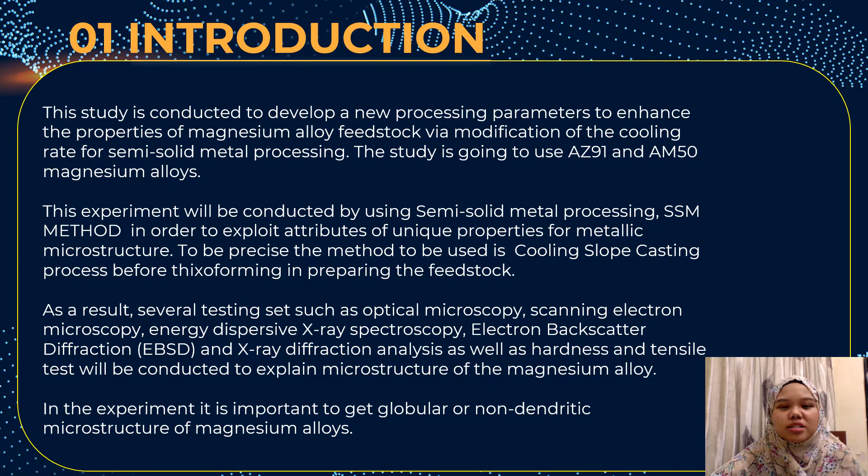This experiment will be conducted by using semi-solid metal processing, SSM, method in order to exploit attributes of unique properties for metallic microstructure. To be precise, the method to be used is cooling slope casting process before thixoforming in preparing the feedstock. As a result, several testing sets such as optical microscopy, scanning electron microscopy, energy dispersive X-ray spectroscopy, electron backscatter diffraction EBSD, and X-ray diffraction analysis, as well as hardness and tensile tests will be conducted to explain the microstructure of the magnesium alloys.

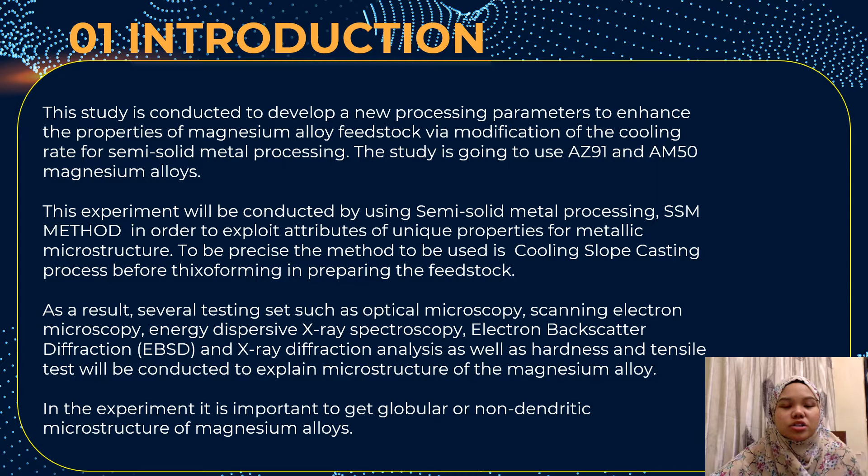In the experiment, it is important to get globular or non-dendritic microstructure of magnesium alloys.

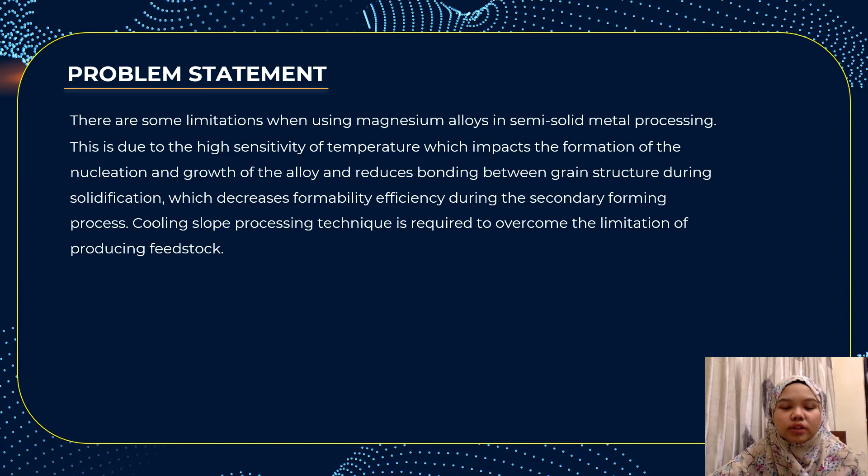The problem statement for the project is there are some limitations when using magnesium alloys in semi-solid metal processing. This is due to the high sensitivity of temperature, which impacts the formation of the nucleation and growth of the alloy and reduces the bonding between grain structure during solidification, which decreases formability efficiency during the secondary forming process. Cooling slope processing technique is required to overcome the limitation of producing the feedstock.

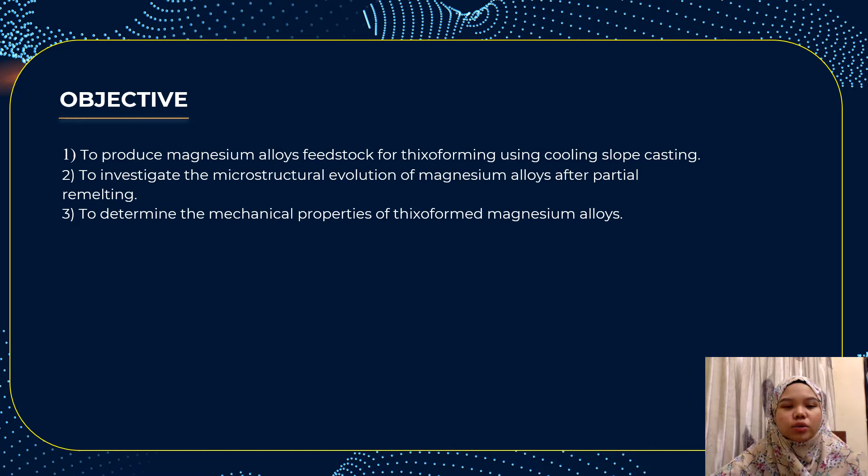The objectives of this project are to produce magnesium alloys feedstock for thixoforming using cooling slope casting. The second one is to investigate the microstructural evolution of magnesium alloys after partial remelting. And the last one is to determine the mechanical properties of thixoformed magnesium alloys.

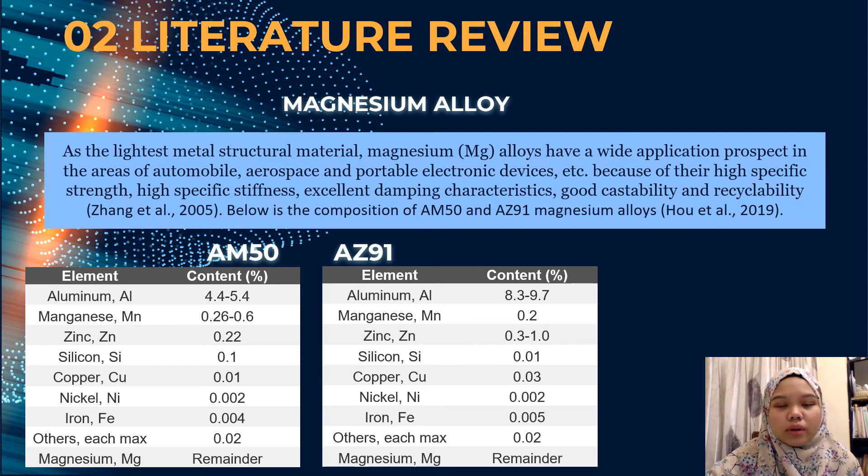As for my literature review on magnesium alloy, as the lightest metal structural material, magnesium alloys have a wide application prospect in the areas of automobile, aerospace, and portable electronic devices, and many more because of their high specific strength, high specific stiffness, excellent damping characteristics, good castability, and recyclability, cited by Zhang et al. 2005. Below are the composition of AM50 and AZ91 magnesium alloys cited by Hou et al. in 2019.

And we are moving on to the semi-solid metal processing. The key element in the SSMP is the globular microstructure rather than dendritic microstructure, and it is the thixotropic behavior of the semi-solid slurry which reduces the segregation and porosity in the castings. Compared with conventional techniques, SSMP provides several advantages like higher product quality, lower forming temperature, higher production rate, and improvement of the mechanical properties through microstructural refinement.

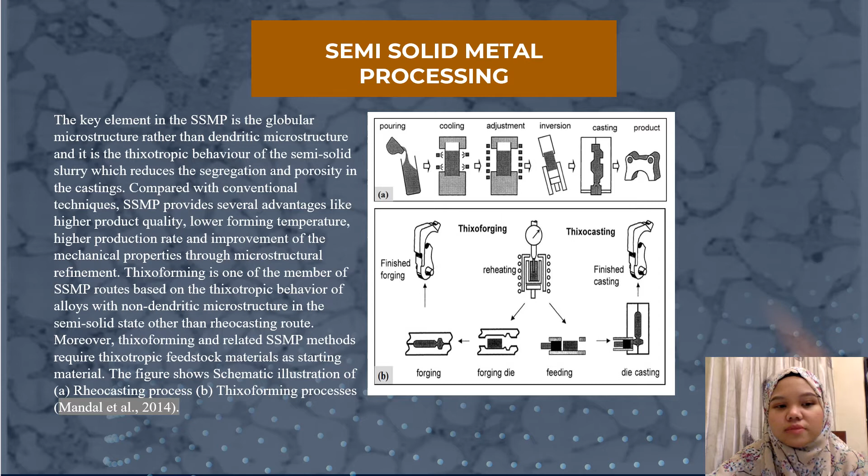Thixoforming is one of the members of SSMP routes based on the thixotropic behavior of alloys with non-dendritic microstructure in the semi-solid state, other than the rheocasting route. Moreover, thixoforming and related SSMP methods require thixotropic feedstock materials as starting material. The figure shows a schematic illustration of rheocasting process and thixoforming process, cited by Mandal et al. 2014.

Next, mechanism for formation of non-dendritic microstructure. Several mechanisms have been proposed to explain the presence of non-dendritic morphology, which involves the formation of fine, near-spheroidal particles through forced convection caused by stirring, as stated by Flemings 1991, Kirkwood 1994, and Fan 2002. One mechanism which distinguishes semi-solid metal slurries from other suspensions is that the particle shape and size vary irreversibly with time.

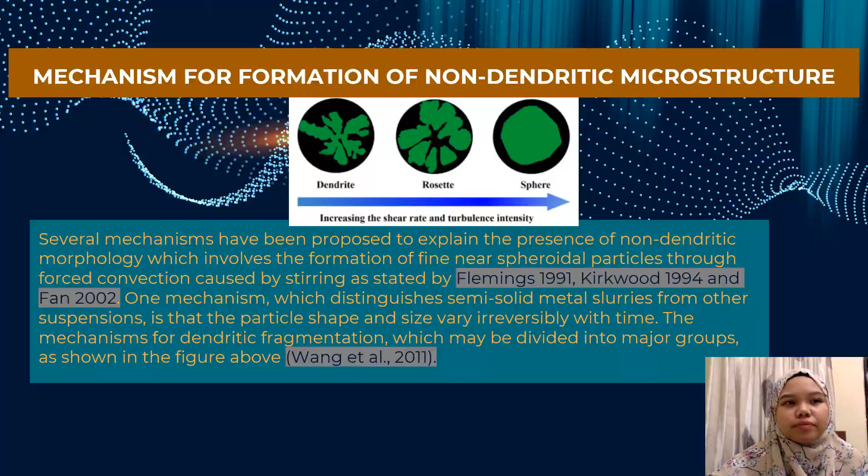Next, I want to explain about cooling slope casting. Cooling slope casting is a simple process which involves pouring molten metal with a suitable superheat through a cooling slope plate and subsequent solidification in a mold. It is a recently developed method to produce raw material for further thixoforming processes, cited by Haga and Suzuki 2001.

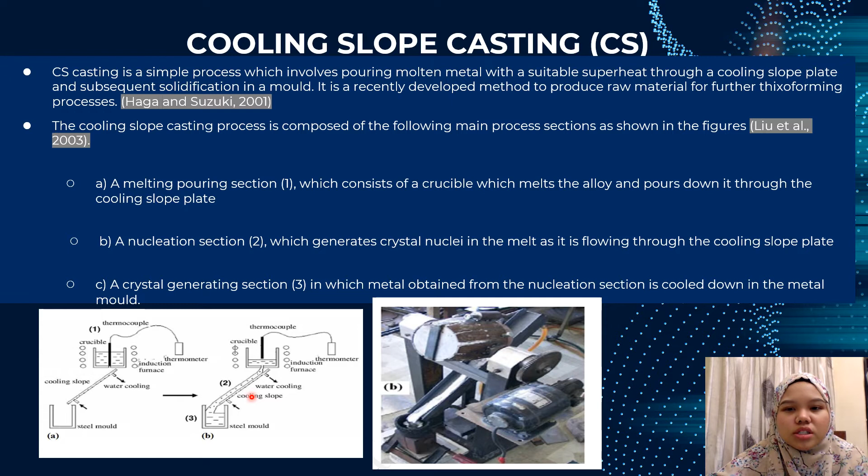The cooling slope casting process is composed of the following main process sections as shown in the figure, cited by Liu et al. 2003. First of all, a melting pouring section which consists of a crucible which melts the alloy and pours it down through a cooling slope plate. Then there is the nucleation section which generates the crystal nuclei in the melt as it is flowing through the cooling slope plate. And then a crystal generating section where metal obtained from the nucleation section is cooled down in the metal mold.

Dendritic morphology upon pouring temperature. Motegi et al. 2004 concluded that the best pouring temperature was 656 degrees Celsius, and they found that increase in pouring temperature resulted in a bigger particle size. Wang et al. 2011 also stated the best pouring temperature is 650 degrees Celsius.

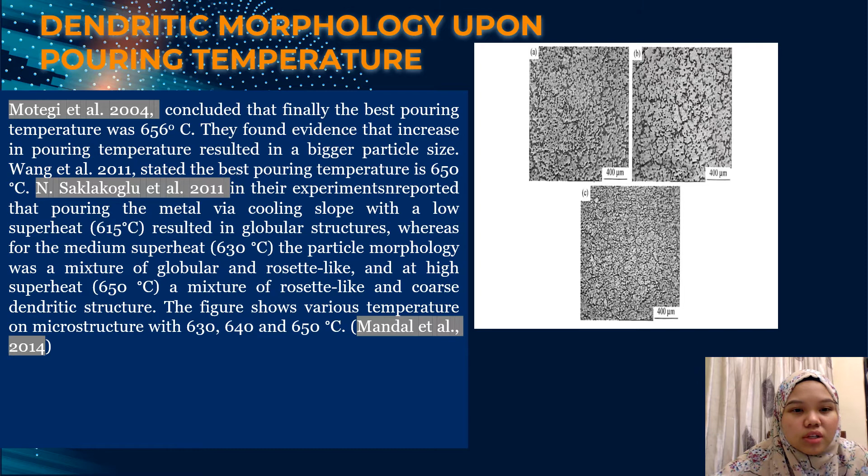Saklakoglu et al. 2011 reported that pouring the metal via cooling slope with a low superheat of 615 degrees Celsius resulted in globular structures, whereas for medium superheat, the particle morphology was a mixture of globular and rosette-like, and at high superheat, a mixture of rosette-like and coarse dendritic structure.

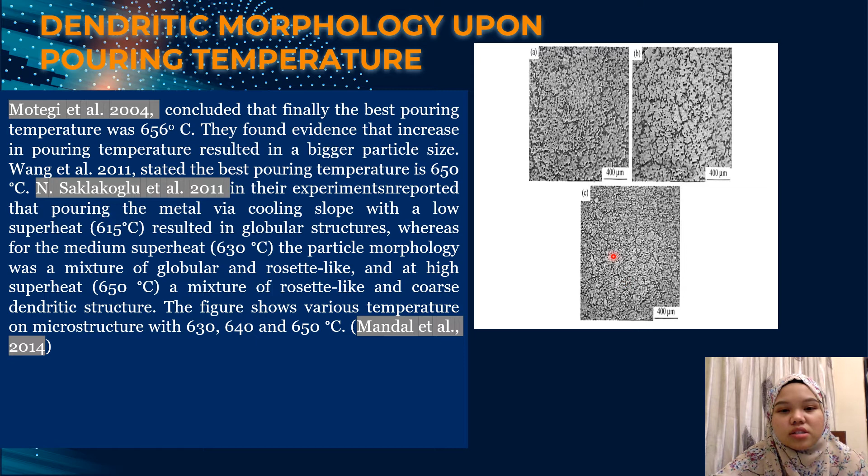The figure shows various temperatures on microstructure with 630 degrees Celsius, 640 degrees Celsius, and 650 degrees Celsius, cited by Mandal et al. 2014.

Moving on to the dendritic morphology upon slope angle. Non-dendritic structure can be achieved when the slope degree is 60 degrees, stated by Wang et al. 2011, citing Motegi et al. 2002, which stated the best condition was a tilt angle of 60 degrees.

Also, Taghavi et al. 2009 investigated the effects of various angles - 30, 40, 50, and 60 degrees - of inclined plate on A356 alloy. They found that applying an inclined plate at 30 degrees cannot eliminate the dendritic morphology of the alloy phase in microstructures, while angles of 40 and 50 led to the elimination of dendrite microstructures, with globular microstructures replacing them.

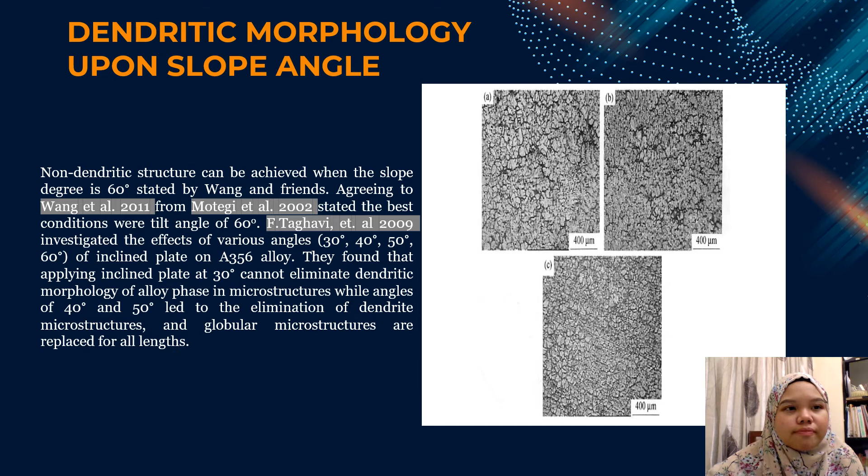For dendritic morphology upon slope lengths, Motegi et al. 2002 stated that the best length of inclined plate or slope is 200 mm. If the length of the cooling slope is too long, the molten alloy flowing onto it forms a solid shell.

On the other hand, short distance generates a small amount of crystal seeds because there is less position available for seeds to be generated. The length of the cooling slope directly affects the cooling shearing time on the melt, which affects the microstructure of the semi-solid melt. Haga and Suzuki from 2001 also reported that a slope length of 300 mm yields globular primary crystal as compared to a 100 mm slope length.

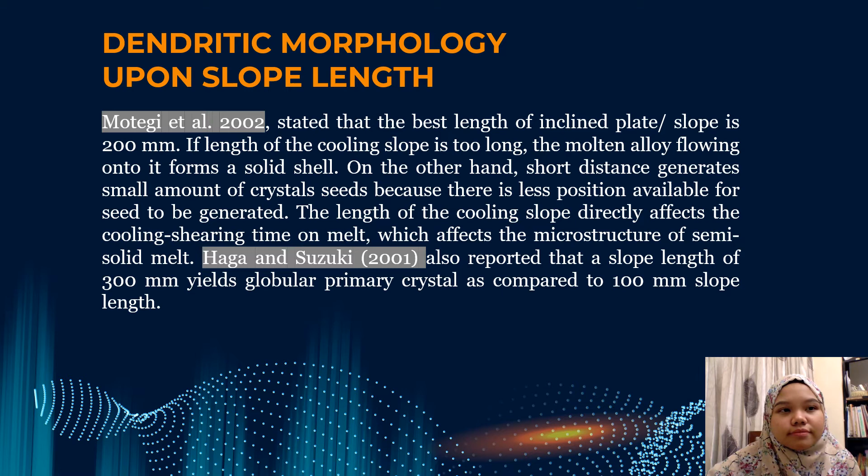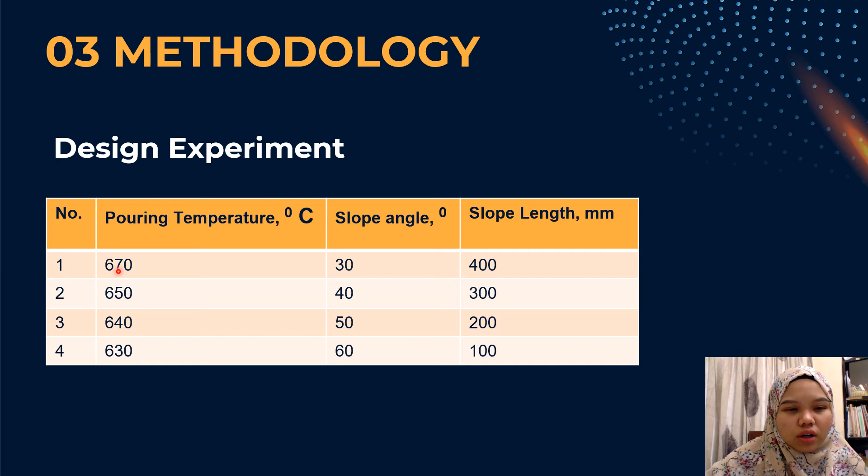As for the methodology for this project, the design of experiment that will be conducted includes the pouring temperature in degrees Celsius, the slope angle, and the slope length in millimeters. These are the four parameters: 670, 650, 640, and 630 for pouring temperature; 30, 40, 50, 60 degrees for slope angle; and slope lengths of 400, 300, 200, and 100 mm.

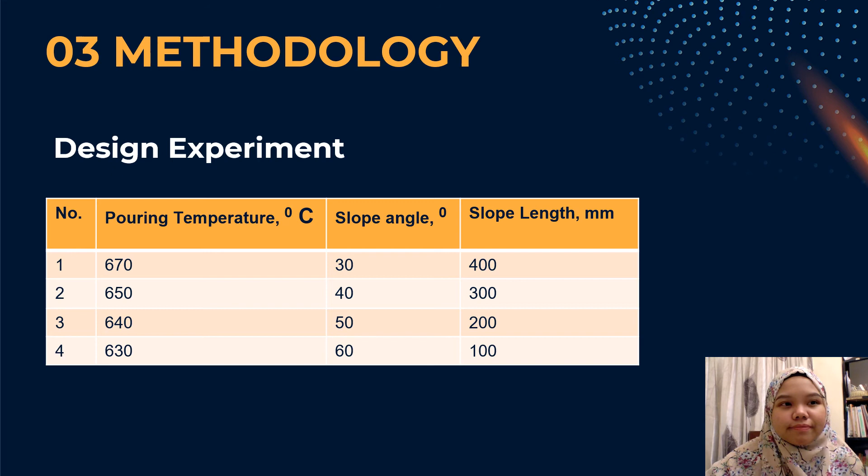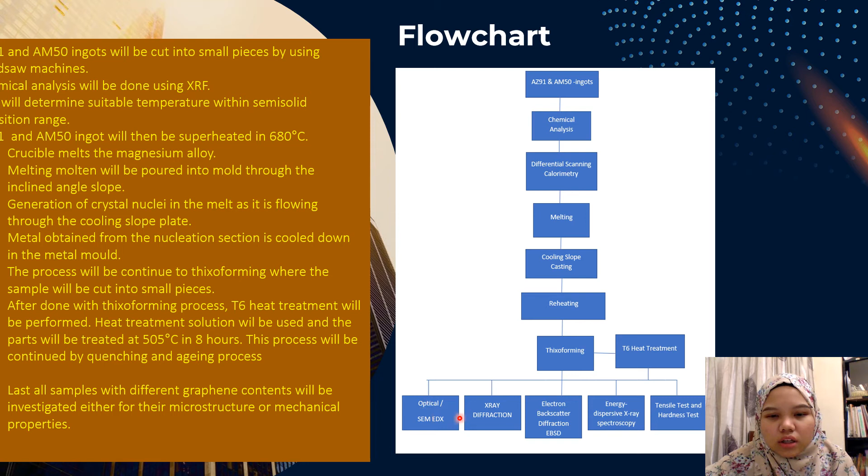And of course we will be testing for several tests, which are optical tests, X-ray diffraction tests, electron backscatter diffraction tests, energy dispersive X-ray spectroscopy test, as well as the tensile test and the hardness test.

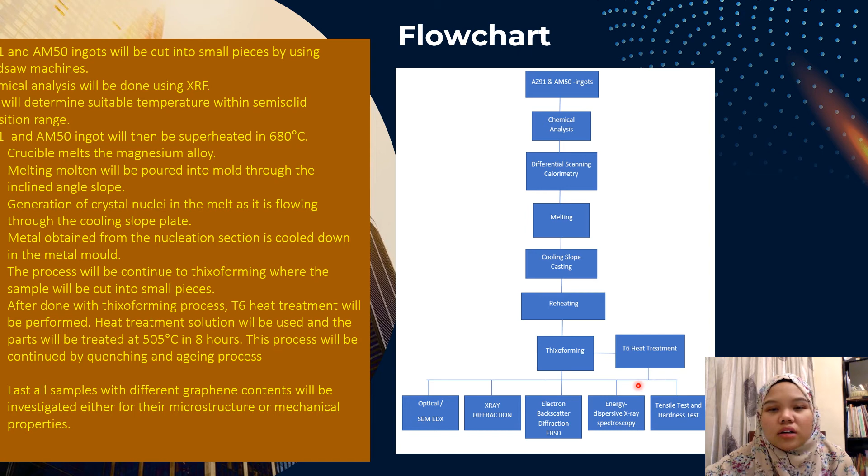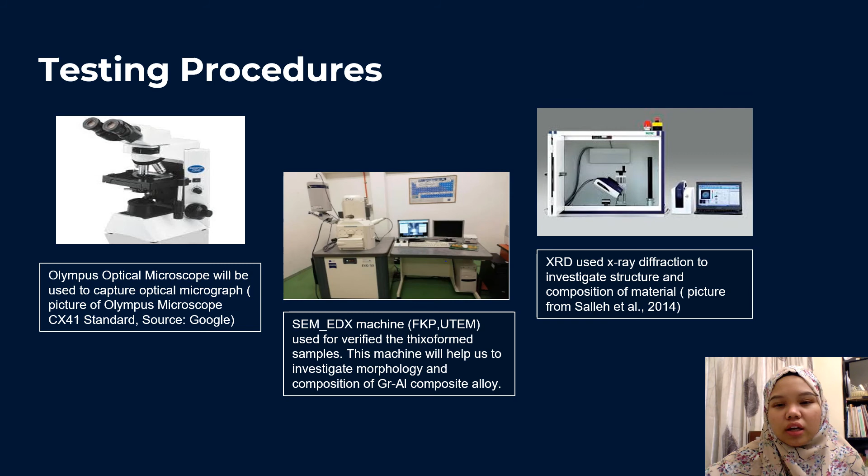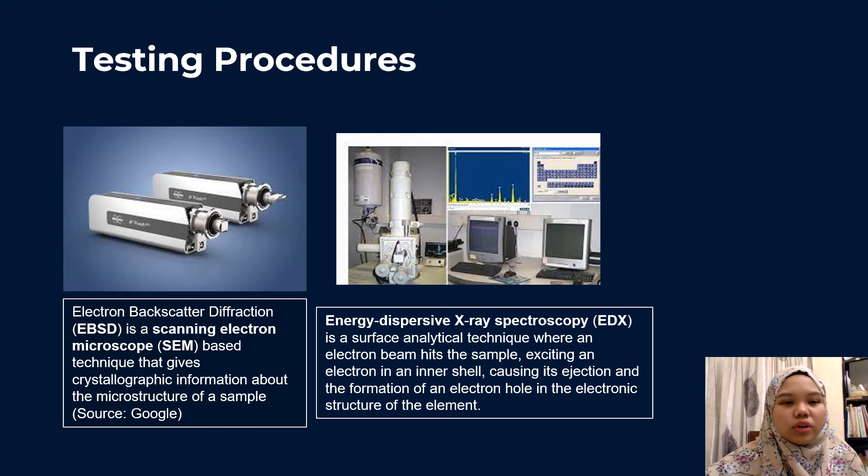So these are the testing procedures. First of all, optical microscope and SEM-EDX machine, and then XRD for microstructure, followed by EBSD (electron backscatter diffraction), then energy dispersive X-ray spectroscopy (EDX), and last but not least, the tensile test and hardness test after the T6 heat treatment.

Moving on to the problem related to this project: resulting dendritic microstructure leads to weak mechanical strength of magnesium alloys. So we have to achieve globular and spheroidal structure for both AZ91 and AM50 magnesium alloys with considered temperature, because magnesium alloys are very sensitive towards temperature, and past works, experiments, and research have been more focused on aluminium alloys.

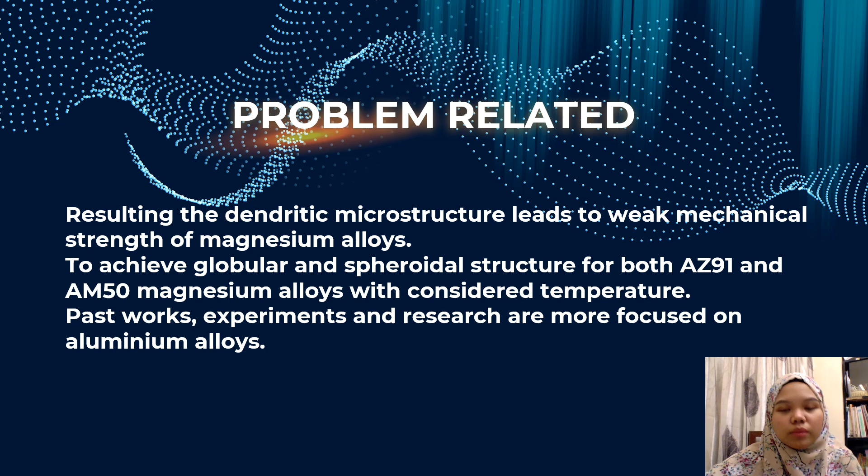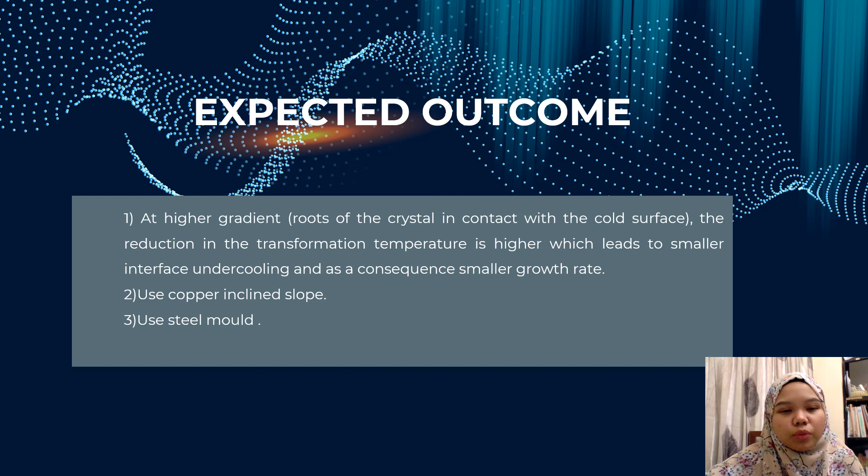The expected outcome from this project is that at a higher gradient, the roots of the crystal in contact with the cold surface experience a higher reduction in transformation temperature, which leads to smaller interface undercooling, and as a consequence, a smaller growth rate. We'll be using a copper inclined slope for the cooling slope casting process, and also a steel mold.